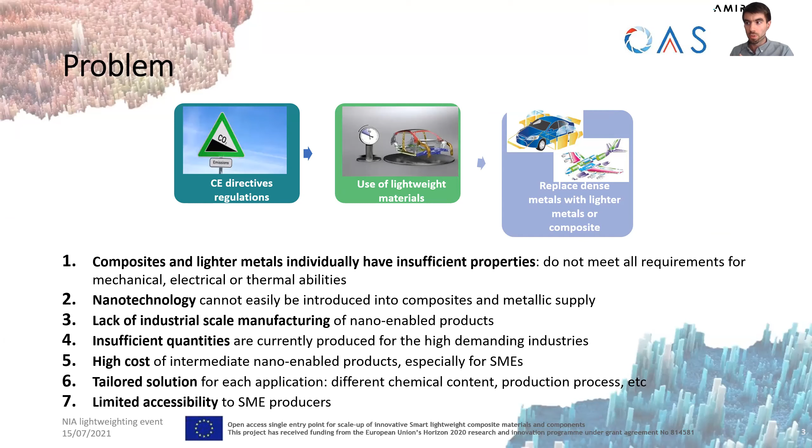One of the other barriers is also that there often needs to be a very specific and tailored solution for each different application when it comes to the production process, the chemical composition of the materials and so on, and the limited accessibility of different infrastructures and machines and pilot lines and equipment to, again, mostly SMEs. So these are the main bottlenecks which the industry is facing today, and they need also specialized expertise in nanotechnology, which has lots of specific attributes, like, for example, the considerations for nano safety.

The investment costs for production facilities are too high, and until we came up with OASIS, we could say that the RTOs or universities often do not offer those facilities or the services linked with the expertise they have in order to cover the full value chain that the companies or the industry might need. There is also lack of information and guidance, and companies, for example the smaller companies or even startups, often require also support in terms of optimizing their business plan or accessing additional finance, be it public or private.

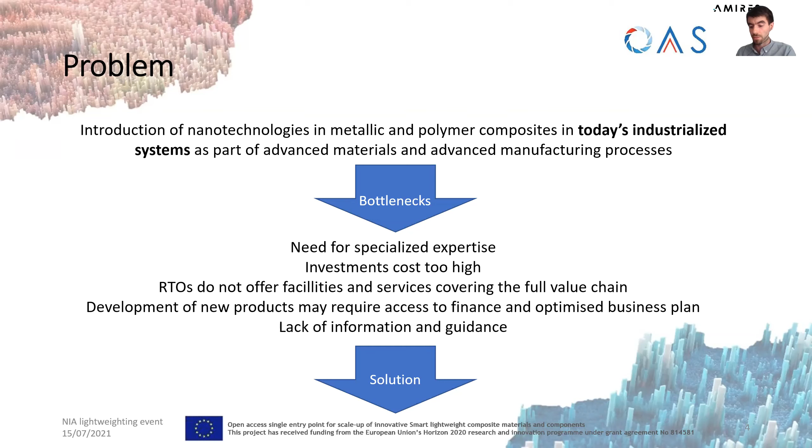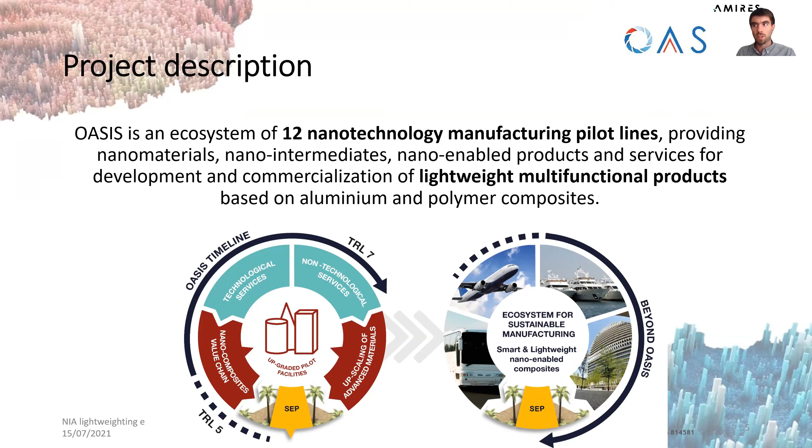Or we have pilot line number 7, which can embed the products with large-scale printed electronics. And at the component scale, these pilot lines are basically integrating the products of the previous pilot lines in different, let's say, production techniques. So this is how we structure our offering.

So the pilot lines, as I mentioned before, we also complement that with product process engineering, with design, modeling, and simulation services, testing and characterization, and also sustainability of the production, also in terms of the nano safety that I was talking about. So covering the full value chain for new product development, also complemented by business support services.

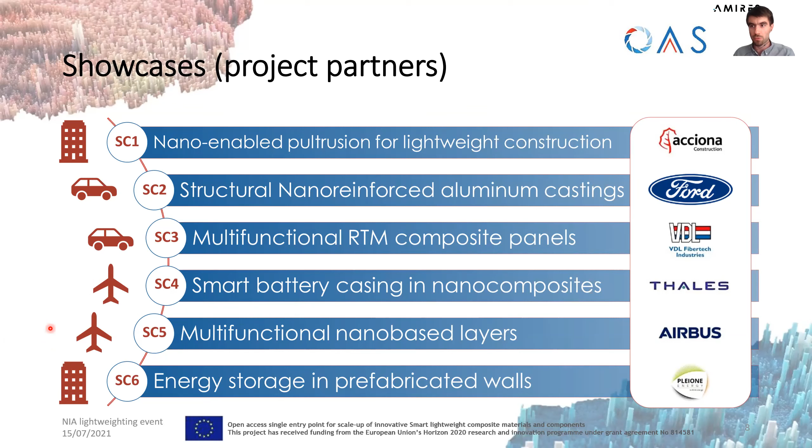You can see that we've got the aerospace, automotive, and building or construction or civil engineering sector in here. But with the demo cases that we have selected through the open call, this is the first batch of them, we have enlarged the scope of the different application areas quite a lot. So we also have railway industry, space industry, even sports equipment in here. So that's the case of Decathlon, which is a good example of a company we're working with, or for example, Trixell, which OASIS is supporting in creating a new portable X-ray imaging detector.

So how can you engage with OASIS if any of this is of interest to you? We have our next and also the last cutoff date in the open call very soon, actually, in 2 weeks. So at the end of July. I would recommend that you check out all the information. I will have all of the important links on the next slide. But of course, you can also reach out to us to ask specific questions.

So some basic information about the open call is that the duration of these demo cases, so of these projects, is a maximum of 6 months. What you get is free access to the services. So there is no direct financing, but free access. So including of course the effort that we put in, some consumables, materials, for example, used at the pilot lines, and access to the machine hours, if you will, access to the equipment and infrastructures.

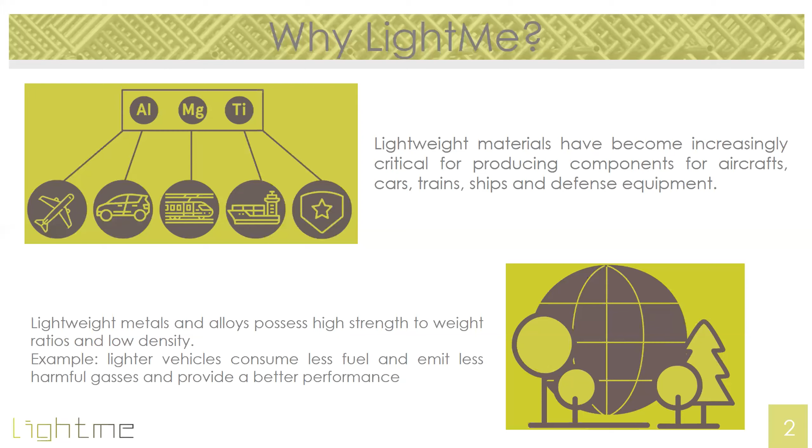What do we want to do with these light alloys? Actually, the main aim is to implement pilot lines available among the partners from a lower TRL to a higher TRL, producing lightweight metal alloy composites. So basically, we want to introduce nanoparticles of different kinds into the source alloys, in order to provide, generally speaking, new functionalities to these composite alloys.

What does it mean, new functionalities? The first point is for sure mechanical properties. So in principle, you can produce objects using less material because the composite material will provide better mechanical resistance, for instance, but not only. According to the nature of the particles, you can also provide, for instance, antibacterial properties. So the aim is wider with respect to only mechanical properties.

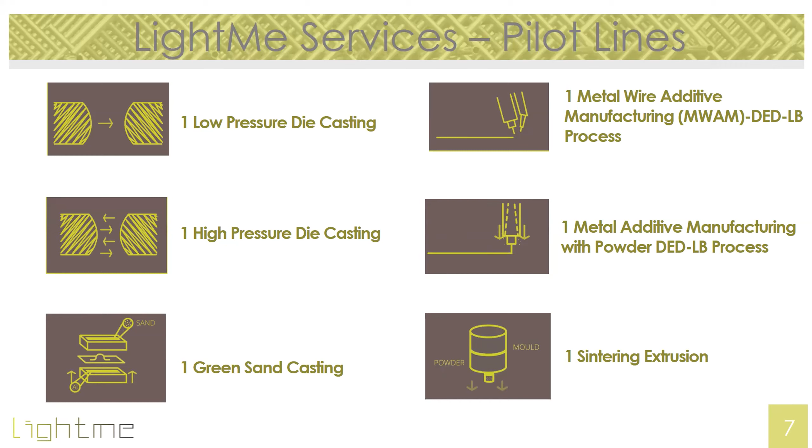And then other services, not less important than the others. We call it innovation management: business plan, marketing, technology transfer. We pay a lot of attention to IP protection, and this is always discussed with the partners that will be in contact with us. And also the last part, dealing with nanomaterials, of course: regulation, standards, and health and safety.

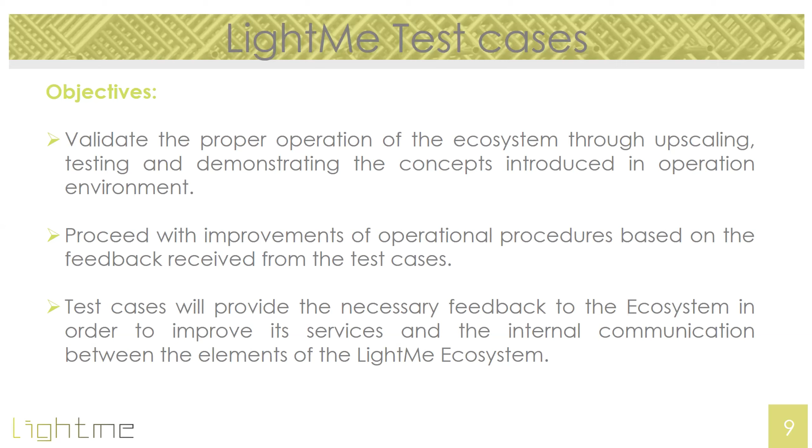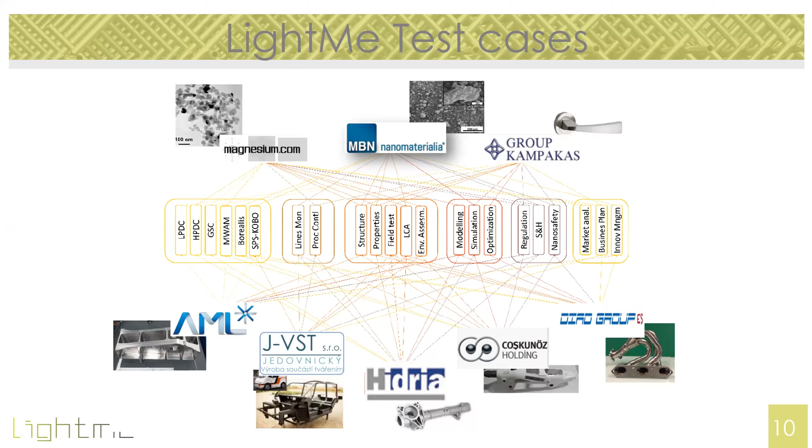I think what is more important is that we have already launched the open call at the beginning of this year. We have already done the first evaluation, so some test cases have already started and are ongoing. Of course, they are open to any entity, so small and medium enterprises, research centers, and so on. There will be a second cutoff by the end of August, then the evaluation in order to conclude all these selections basically by the end of this year.

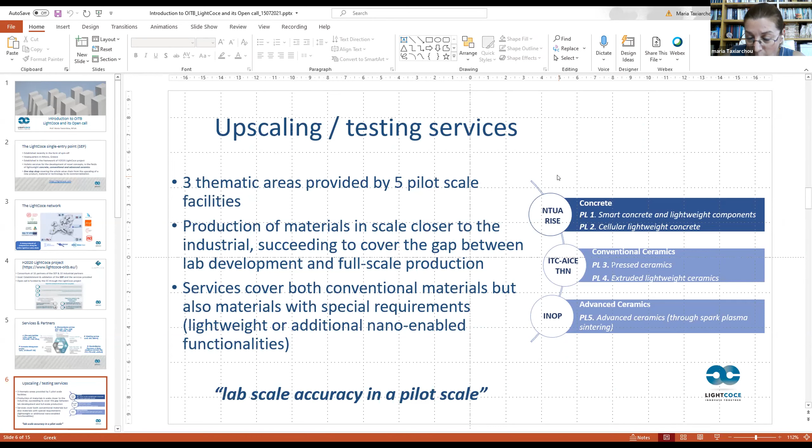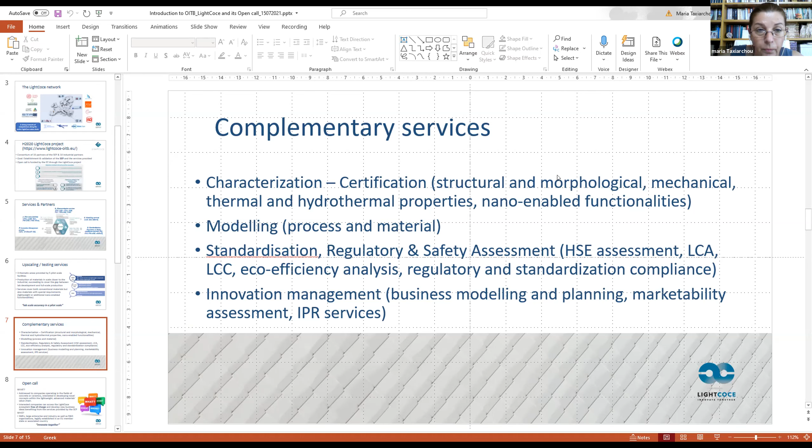Now we have launched our open call a month ago. The open call is addressed to companies operating in the field of concrete or ceramics that are interested in developing new ideas within the area of lightweight and advanced materials. These services will be provided free of charge because they are covered within the LightCoCe project. And the idea here is to give the opportunity to the applicants to develop new business ideas and benefit from these free of charge services provided by LightCoCe.

The open call is addressed to, of course, all organizations working in this field of concrete and ceramics, but an emphasis will be given to the SMEs and smaller, let's say, size companies that do not have the budget and the infrastructure for the development of new ideas, new products, and of course to large enterprises and also R&D organizations legally established in an EU member state or an associated country.

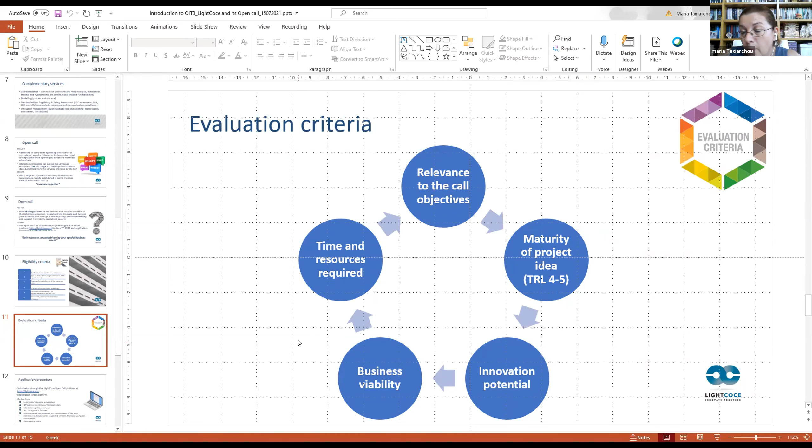Based on these eligibility criteria, we have formed our evaluation criteria, which are, of course, the relevance to the objectives of the call and the field of expertise of our ecosystem, the maturity of the project, of the idea. We need a starting TRL of about 4 to 5, the time and the resources that are required, the innovation potential, and of course, the business viability of this idea.

The submission of the application will be made through the LightCoCe platform. First, the interested entity has to register in our platform to provide some general information about the entity and the official representative of this entity.

And then, of course, they have to identify which of the services they need for their test case, give some general features for the test case, and then provide some more detailed information concerning the concept of the idea, some milestones that have been achieved so far, which are the required services and the technical work

plan, which, of course, will be formulated and finalized together with the partners of the ecosystem that will work on the specific idea. And of course, in order to submit their idea, they have to sign the data privacy policy.

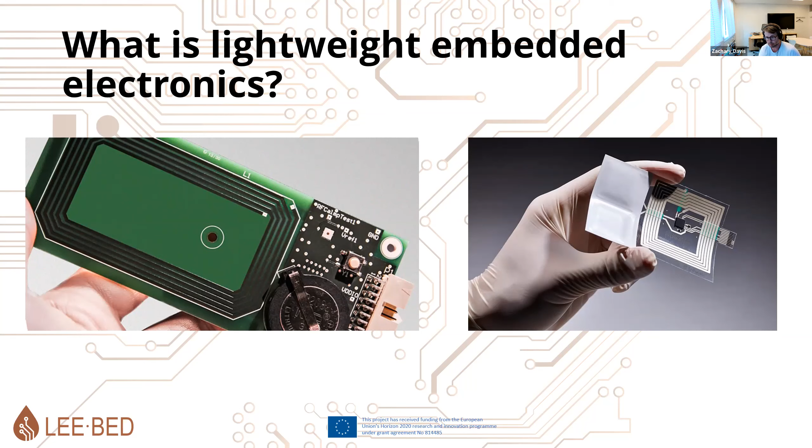So this is going to make it easier for products to gain electronic functionalities by making them lightweight, but also very flexible and maybe even sometimes stretchable formats. So in order to be able to do this, we need not just one, but the collaboration of many experts working on a variety of different activities within the value chain. So this is why LeeBed was commenced, and this is what we're working towards.

So LeeBed is a single entry point where we're trying to make a one-stop shop for people that are interested in getting involved with printed or flexible embedded electronics. We have, of course, a website acting as a single entry point, very similar to the rest of the projects. Once we get into the single entry point, we have a three-phase procedure, going first with a techno-economic modeling phase, where we discuss with the customer, we look at the idea, what is feasible, what is not feasible, are we doing upscaling, are we doing a proof of concept.

We're trying to answer all these questions, and we can also provide a lot of different preliminary non-technical services which will be very helpful for the customer. Once we have done this and we're ready to go to the lab, we have quite a few pilot lines, and then we do a pilot project where we get into the lab and do some real hands-on work. And in the end, we can also help the customer transfer the knowledge into how do we get to the market from here.

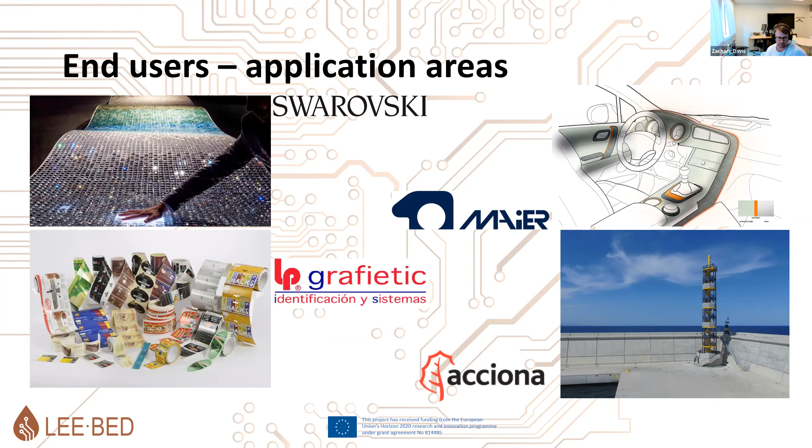So in the techno-economic assessment phase, which is the phase 1, this is what happens right when you enter the single entry point. We have a variety of different non-technical and I guess also technical services. The first one is, of course, quite important, a technical assessment. We try to figure out together with the customer what can be done, what technical solutions can we provide to the customer. This is a mandatory assessment that needs to be done before we go into the pilot lines. We can also then provide different types of other, very valuable services. For example, looking at the safety assessment, looking at the materials and the processes. Are there any safety or regulatory issues there that we should be aware of?

We can look at the economic part. How much would these things cost? What would be the production or material costs once we have a prototype or even an upscaled production? What is the life cycle estimate? What's the sustainability of the processes and materials we're looking at? That's quite important for a lot of companies nowadays.

Patent mapping. So what is the landscape? Has the idea been done? Has it been produced by someone else or patented by another company? Where these other patents are, etc. And finally, last but not least, we have pilot projects financial support. That means for companies that need financial support accessing the pilot lines, we can help them do that as well.

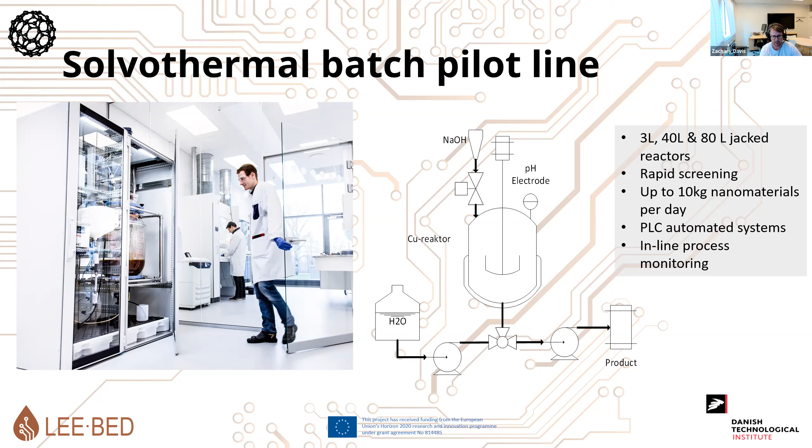We can produce up to kilos a day of certain materials, and everything is usually PLC automated with inline process monitoring, etc. Just to give you some examples of the materials we've been working with within LeeBed: nano copper, nano silver, silver nanowires. We also have copper nanowires, which is not here, something very new. Silver on carbon support, so hybrid materials, dielectric materials, magnetic, and many more. So if there's any very specific material or application you're looking at, just come to us and we can try to figure out what to do.

If we go to the formulation, some of the pilot lines, one of the main issues and the main challenges we're trying to tackle in LeeBed is the development of new products. Usually this takes quite a long time. It's very tedious, a lot of work, especially because the idea is that you take some materials, you mix them together, and it doesn't work. Then you do it again and you do it again. So the idea is trying to really streamline these processes through AI and robotic systems.

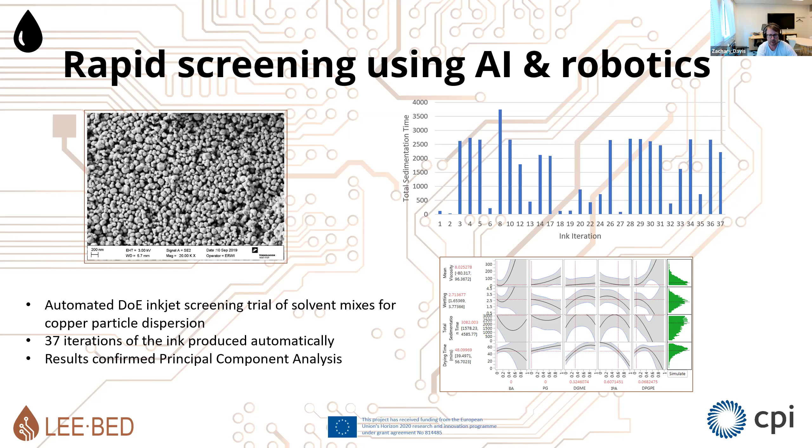So this is an example of that. We're taking some of the copper we made in some of the materials. We did a design of experiments where we're trying to find the optimal dispersion recipe for adding some copper particles with a solvent and a binding system in order to really get a really good inkjettable ink. This is just some of the nice things we've done here. And then here, of course, what we've been able to do is actually successfully, in a very short amount of time, provide recipes for very, very well formulated inkjet inks that are made of nanoparticles of copper.

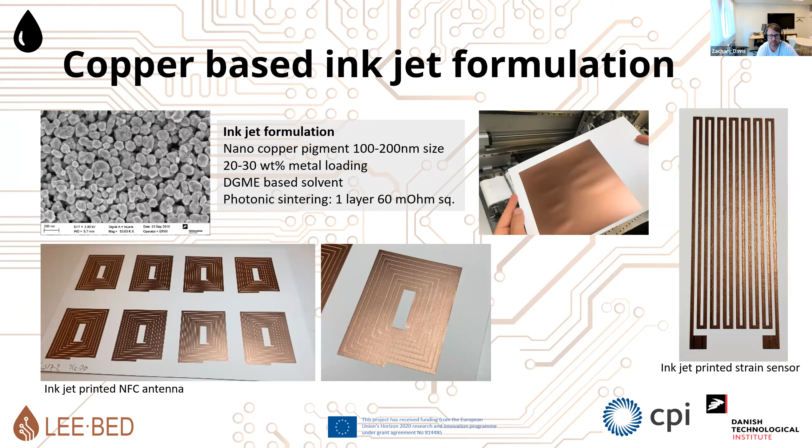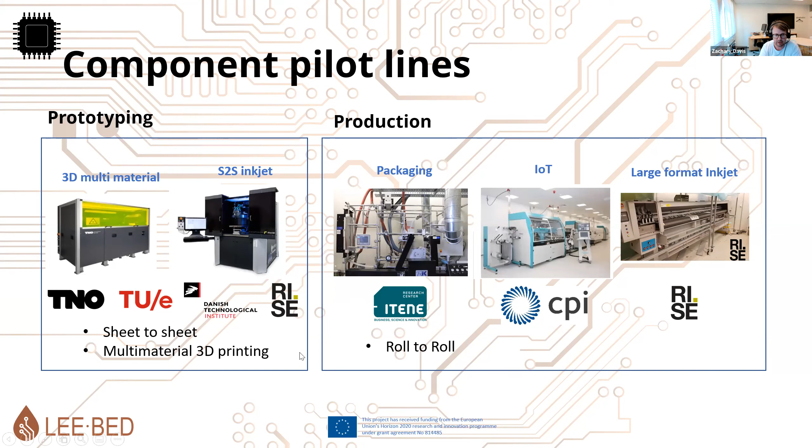If we look at the component pilot lines very quickly, we have, of course, prototyping, and these are based mostly on digital inkjet or 3D printing technologies. And then, of course, we have the more production lines where we scale up to roll-to-roll or sheet-to-sheet lines as well. And we have rotary screen print, regular screen print, flexographic printing. We also can do roll-to-roll mounting, etc., and also large format inkjet printing. So quite a lot of technologies we have in the printing and making of components.

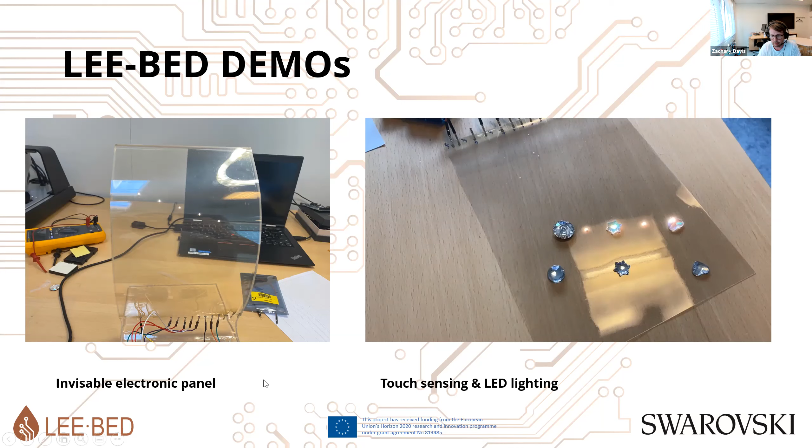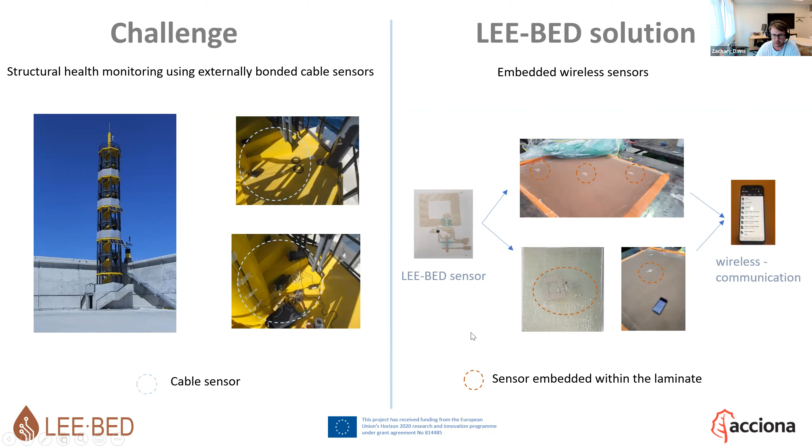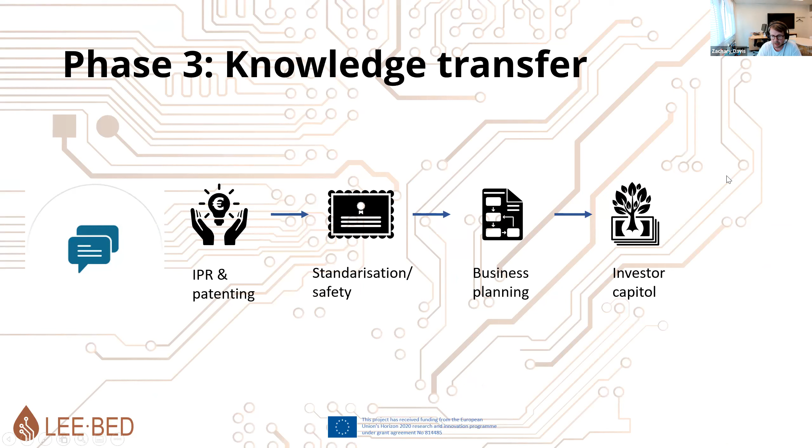Phase 3 is something that we have just started working with, but it's more trying to figure out what to do when we're done with the pilot projects. So we're talking about IPR and patenting, standardization, business planning, and investor capital. So also getting companies involved, or at least helping them find investor capital if they need that.